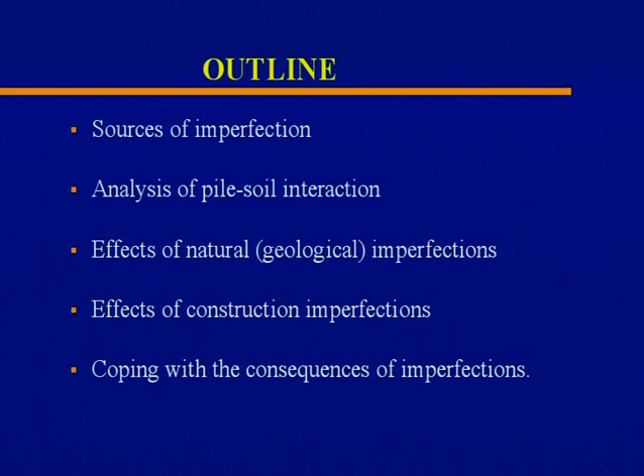I thought it would be useful to collect together some information and experience on how imperfections of various types influence pile behaviour. So I'm going to talk about the sources of imperfection, briefly, then say something about the analysis of pile-soil interaction and how we arrive at some conclusions. Then I'll talk about the effects of geological and natural imperfections, and the effects of construction imperfections, and finally how we cope with the consequences of those imperfections.

We do some investigation, and then we idealize the situation. We look at the model of the structure, the model of the foundation, the model of the stratigraphy of the soil, the geology. Then we input into our mathematical model material properties that we have assessed, and we come out with a prediction of behaviour.

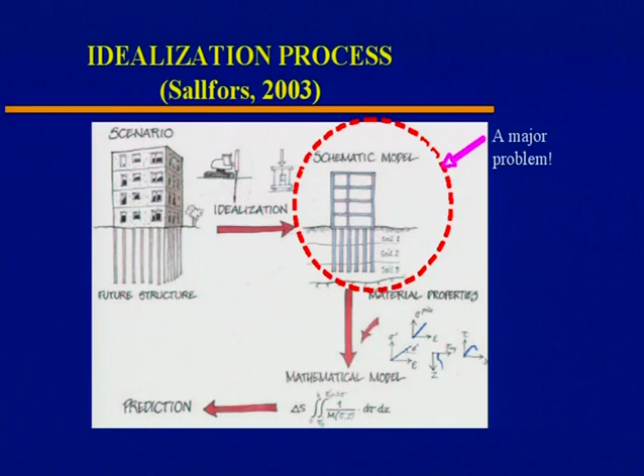So this whole process of prediction involves a number of fairly critical steps. What I'm really talking about today is this component of the system, the idealization of the model, and in particular how we model the piles and how we model the soil. That is a major problem.

In developing the schematic model, obviously the first thing we have to do is represent the site geology, and then simplify it to represent the stratigraphy as best we can, because we can't in a practical sense include every element of the real site geology. Then a major component is to assign geotechnical and structural parameters to the problem, and consider some of the realities: that soil behaviour is non-linear, pile behaviour is non-linear, and that the soil, rather than being a homogeneous isotropic elastic half space, is actually a layered non-elastic material.

We also have the possibility that loading of our foundation system may occur not only because of the weight of the structure and the forces on the structure, but also because the surrounding ground may move. I think Professor O'Rourke will be talking more about that in his lecture later on.

The sources of imperfection that I'm going to look at arise from three major sources: natural geological sources firstly, then inadequate investigation, and thirdly imperfections related to construction. Terzaghi, of course, has a quote that tells us that the earth in its natural state is never uniform. Unfortunately, in practice, clear and simple soil conditions are rather uncommon.

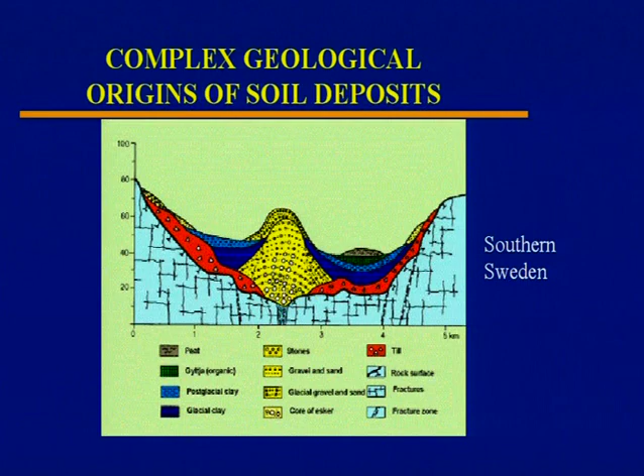Yet unfortunately, in much of our practice, we assume clear and simple soil conditions. There are many situations where the conditions are certainly not simple and clear. This is the geological origin of some deposits in southern Sweden, where the idealisation of this particular formation as a homogeneous semi-infinite isotropic elastic half space would be somewhat imperfect.

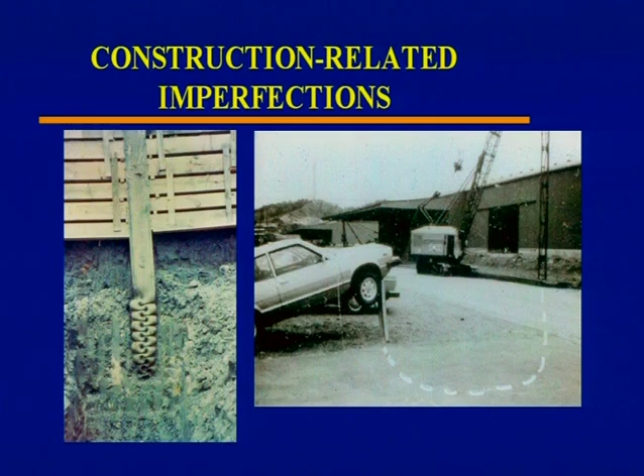And this very famous diagram, many of you will have seen this before, in Sweden, pile driving on this side of the road, driving, why are we not reaching rock? And of course what had happened, this pile, because it's an H pile, had turned around and was actually jacking this car up. So that's a pretty extreme example of imperfection, but compare this to what we assume in design, which is a vertical elastic member, and you'll see that this is anything but that.

And then, of course, we have the all too common situation where we have drilled shafts which are not integral. There are gaps in the concrete, there's exposed reinforcement and necking and so on, all sorts of difficulties if the pile is not constructed correctly. And yet, in our idealisation, in our design, we assume the pile to be a perfect elastic cylinder.

Now, if we're going to examine the consequences of these types of imperfection, then we need to have some tools available to look at those consequences. And in what I'm going to show you, I've used 2 or 3 different tools, depending on the problem. The first tool I've adopted is finite element analysis, trying to look at mechanisms and capacity of the pile or the pile tip as appropriate. Secondly, I've used boundary element analyses of pile-soil interaction, which incorporate both nonlinear soil and pile behaviour, and also the interaction between piles in a group through the soil.

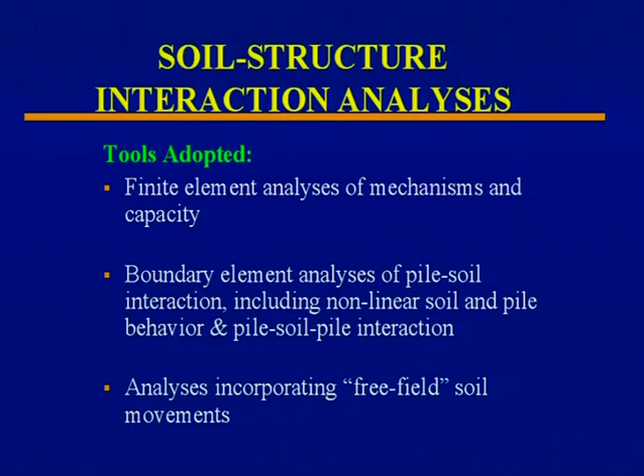And associated with those analyses is the ability to incorporate what's called here free field soil movements. These are ground movements that will impinge on the pile from some external source. And with that latter type of analysis, there are basically 2 ways you can go. The first is that you can do a complete analysis where you model the pile, the soil, the loading and the source of ground movement all in one single analysis. And this gives you a complete solution, but it's often complex and time-consuming, and it's often difficult to get all parts of that modelling correct.

And so I have preferred a 2-stage approach or a substructuring approach where we separately calculate the free field soil movements due to whatever the source of soil movements is. We then carry out a pile-soil interaction analysis using, for example, boundary element methods, and we find this to be generally a rapid and efficient way of doing the analysis, and one that is very suitable for parametric studies.

So I'm now going to look at some geological sources of imperfection, and I'm going to look, in some cases rather quickly, at 4 sources of imperfection. The first is where we have clay seams present below the pile tip. So the pile goes through soil into rock, but in the rock there are clay seams, a not uncommon situation. The second is where we don't have horizontal layers, but we have layers of variable thickness and perhaps sloping bedrock. The third case, one that I alluded to before, is where the piles are in fact founded in a stiff stratum, but there is a compressible stratum below, which will of course impact on the pile performance.

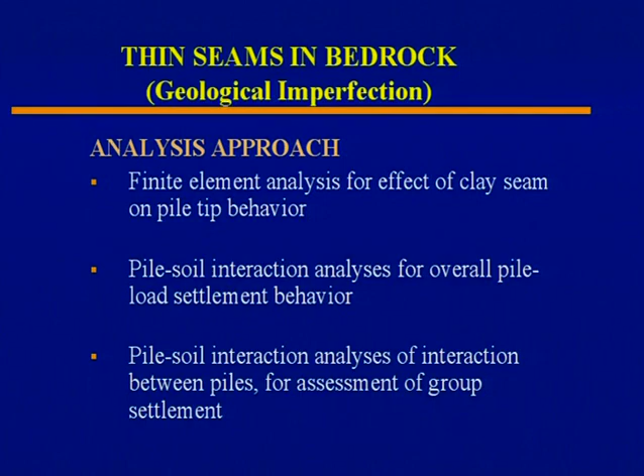I'm not going to go into great detail on that last issue, but let me start off with this basic problem. This represents the tip of a pile, and even though I'm looking at imperfections, it is of course idealised, but we have to make idealisations to get answers. So here's the pile tip. It's a rigid circular area of diameter d.

Here is our rock, which then has this clay seam, which is about 1/100th as stiff and as strong as the surrounding rock, and that clay seam is of a thickness Ts and is at a distance Zs below the base of the pile tip. And if we do finite element analyses of this particular problem, we get some indication of mechanisms and also of the effect of that clay seam on the load settlement behaviour of the tip.

Now, this first diagram is simply displacement patterns that come out of a finite element analysis, Plaxis in this case, when there is no clay seam here. So this is all rock. So basically this is the sort of pattern we would expect. The footing goes down, it pushes the soil up outside, and that's more or less what we expect.

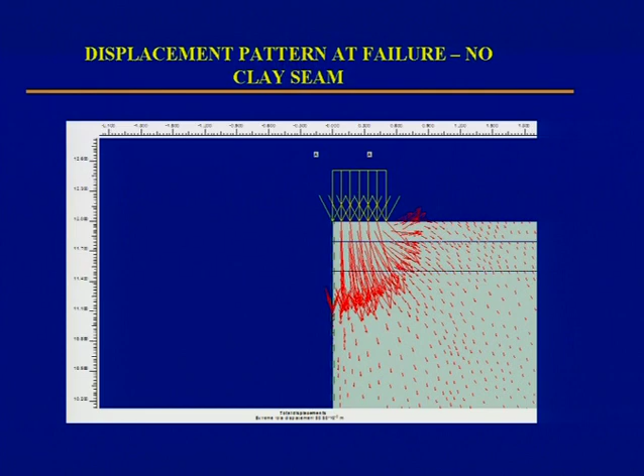This is load, this is settlement, and for the rock alone, without the clay seam, we have this rather stiff and strong behaviour here. And in fact, it turns out this strength is about 60 megapascals, which I can't convert into tonnes per square foot for you, but it's pretty strong, okay? It's basically the strength of concrete.

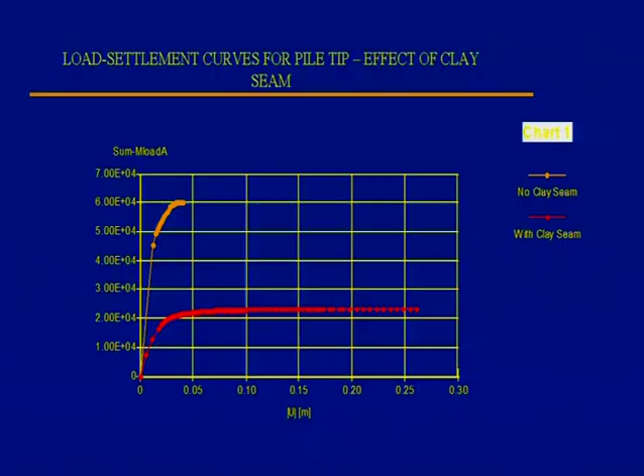However, with the clay seam, what you see here is that the capacity of the pile tip is substantially reduced, and also its stiffness is substantially reduced. So that clay seam does indeed affect the overall behaviour of the pile tip. And we can look at this in a parametric sense by defining a couple of correction factors.

I find it's always useful to look at these sorts of effects in terms of a correction to the ideal situation. So we define here a base capacity reduction factor, BCR, which is the base capacity with the clay seam to the capacity without the clay seam. And similarly, we can define a stiffness reduction factor for the base, BSR, as the base stiffness, load divided by settlement, with the seam to the base stiffness without the seam.

And so here's some parametric studies of that situation. Here is our base stiffness reduction factor, BSR, and here is the other one, the base capacity reduction, BCR. Let's just look at this top one now. This is the base stiffness reduction factor.

This is the relative thickness of the clay seam divided by the diameter of the pile tip, and this is the relative distance of the clay seam from the bottom of the pile, going from 0.8 diameters down to 0 diameters, which means that clay seam is right at the bottom of the pile tip. And what you see is more or less what you would expect, that the thicker the clay seam, the greater is the reduction in stiffness. And also, the closer the clay seam is to your pile tip, then the greater is the reduction.

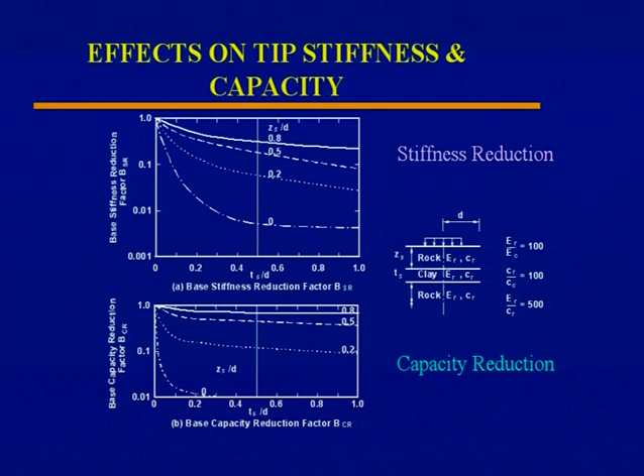And we have a very similar situation here for the capacity. So you see, that clay seam has a very dramatic effect potentially on both capacity and stiffness. Now, it's interesting to compare those theoretical studies with some design recommendations.

So what you see is, in fact, that there is a general correspondence between what we calculate and what we use in design practice on the basis of empiricism, although these design values are fairly extreme and are really most relevant to where you have the clay seam fairly close to the tip of the pile. If the clay seam is much further down, then the reduction in capacity is rather less than these design rules would indicate.

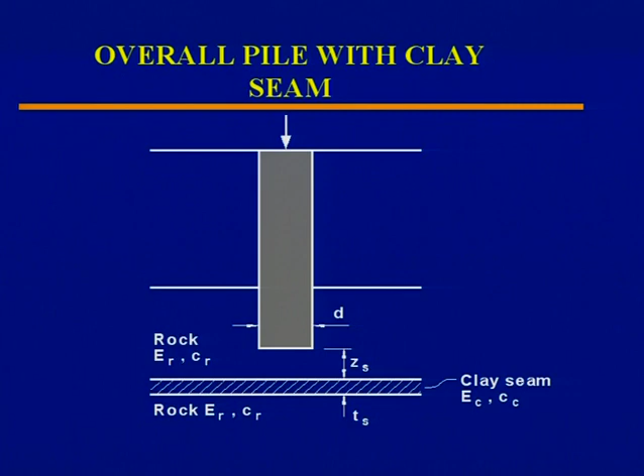So let's then look at the overall pile, because what we've focused on up to date is the pile tip. Now, of course, we have another component, the shaft, which provides capacity and stiffness. So how does the overall pile react to that clay seam? Well, when we incorporate the reduction in capacity and stiffness of the pile tip into this analysis, what we find is illustrated in these two diagrams.

And what we find, if I can just summarise, is that as the pile gets longer, as the length to diameter increases, the reduction in capacity compared to the case of no seam decreases. So we don't have such a dramatic effect of the clay seam on the overall pile when you have the shaft contributing. And of course, if that clay seam is relatively deep, then its influence is even less.

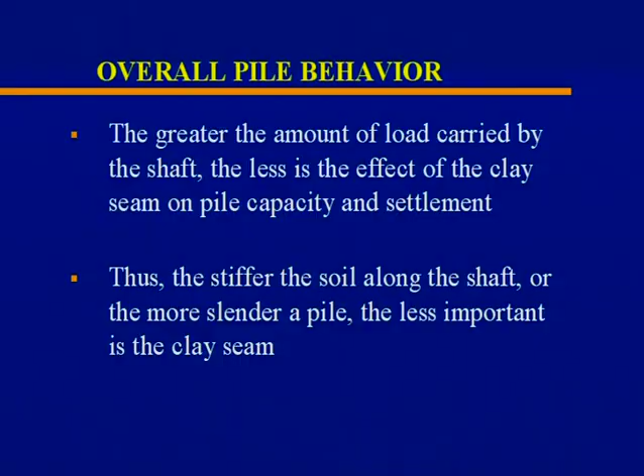And so the stiffer the soil is along the pile shaft, or the more slender a pile, the less important is the clay seam. However, I think you'll see that over-idealisation, ignoring the presence of clay seams, can certainly lead to some negative consequences as far as your prediction of pile capacity and settlement is concerned.

If I can just summarise very briefly the effects of a clay seam on a group of piles, it turns out, can be affected by a clay seam rather more than a single pile for two reasons. One is that the clay seam, relative to the overall dimensions of the pile group, will be closer than it is for a single pile. So it will sort of enhance the ability of the overall group to behave differently.

And the other thing is that we find that with a pile group, you tend to have more load coming down onto the base of the piles than you do with a single pile. And again, that means that the base is going to be more influenced than the shaft. So clay seams are nasty, potentially, and we need to try and incorporate them where we can into our design.

The next problem I want to look at rather briefly is what happens if piles are founded in a layer of variable thickness. And there are two or three consequences that we need to understand. The first of these is that if the piles are of different length, then they're likely to be of different stiffness. And so once you put vertical load on a pile group which does not have a uniform stiffness, then even though the load is vertical, the overall group will tend to rotate.

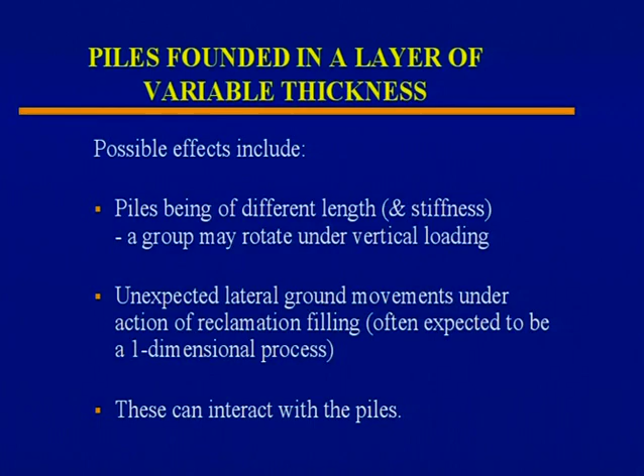And so I don't have time to go into this one in detail, but let me just give you the bare bones outline of this case. This was a building, a 27-storey residential building that was supported on 144 steel H-piles on a reclaimed area. And they were driven to a harder stratum, not to rock, but to a harder stratum. Now, this reclamation, there was some soft soil on the site, and so there were large settlements adjacent to the building, and that was expected.

And so what we found was that there were differential settlements of about a foot between the pile-supported building and the driveway that was obviously not pile-supported. So that was expected. What wasn't expected was that there were also lateral movements near the building because of the fact that the thickness of the clay, the compressible clay, was non-uniform, and also this building was getting towards the edge of the reclamation near a river close by.

And what in fact happened, we have convinced ourselves, is that these lateral movements actually generated very large bending moments and shears in the piles, and cracks developed in the pile caps, and some piles were actually detached from the pile caps, so they rotated so much, and of course they settled, that they actually came out of the cap. And so this caused a rather nasty cracking of the building.

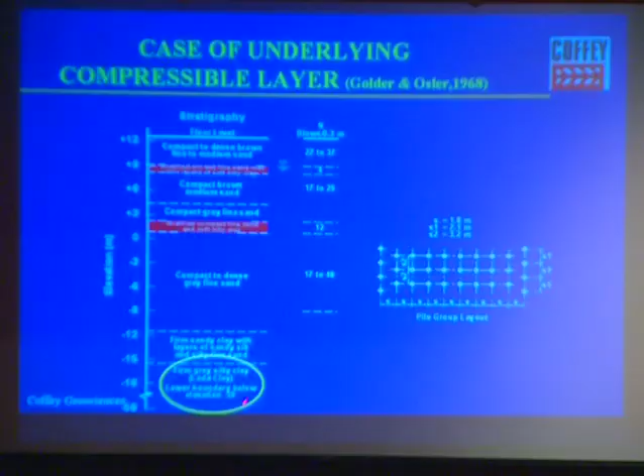Now, unfortunately, lower down here, below the tip of the piles, there was one of the classic formations in Canada, the Leda clay, which is a very quick and compressible clay once it goes beyond its pre-compression limit. What these people had done, not Golder because they told the story afterwards, but the designers had come in and done a pile load test, founded a single pile here, and what they found was, under the working load, it settled a millimetre. Only a millimetre. Terrific. Let's allow for group effects, so we expect settlements of 3 to 6 millimetres. Great. Well, what they actually measured several years after was a maximum settlement of the order of about 74 or 75 millimetres and counting.

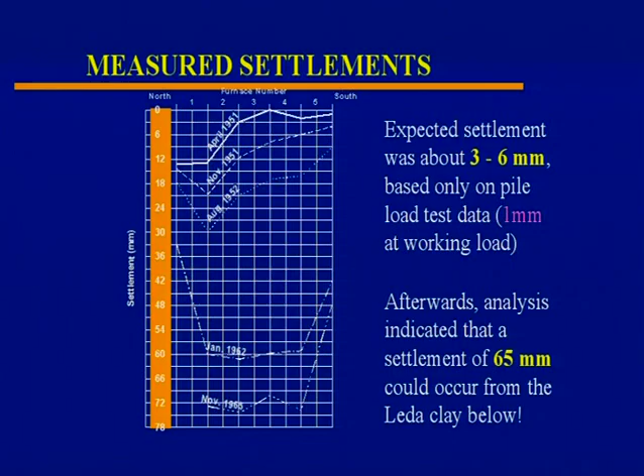And of course, what happened, if we go back to the previous diagram, was this, that whereas a single pile driven down here will have very little influence on this compressible clay layer here, a group of piles, which of course is of much greater extent and whose pressure bulb is much more extensive, will indeed load up the Leda clay. And that's what happened. And then in the post-mortem here, Golder and Osler indicated that they reckoned that there could be about 65 millimetres of settlement coming from the Leda clay below. So this is a warning sign.

It's very common, I've found, for clients to want to found their piles up as high as they can, obviously to save money, and there may be compressible layers below. And I think you need to think very carefully about how you do the assessment of settlement in particular and capacity as to whether or not that's a sound strategy to pursue.

So the lessons from this, and there's always lessons to be learned: don't use single pile load test data to predict group settlements without proper ground characterisation. By all means use pile load tests, I love them, but be aware that the group has a different volume of influence than a single pile. And of course compressible underlying layers can cause substantial increases in settlement.

The last geological imperfection I want to talk about is the effect of a boulder. And just to show you how boulders can occur, this is a slide that was provided to me by Dr. Manfred Nussbaumer from the Züblin company in Germany. And he'd done a project in Germany where they drilled a couple of boreholes reasonably close by and found dense sand, medium dense sand here, a bit of clay, marl, but that looked fine. And then when they were actually excavating for construction, what did they find but this rather ugly boulder here?

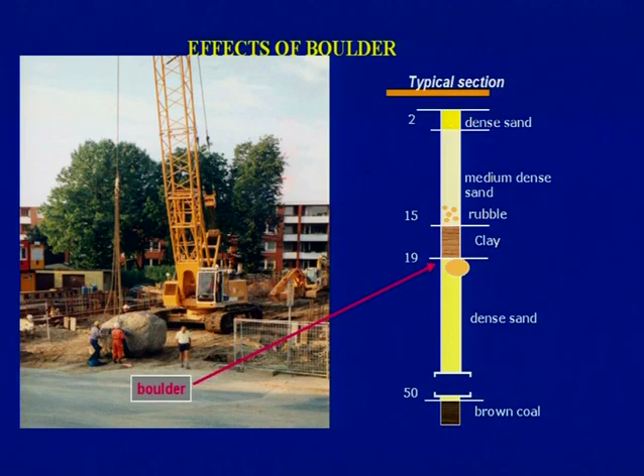And so boulders can arise in these sorts of situations, particularly, I guess, if they're in glacial regions, and they can influence the behaviour fairly significantly. And my interest in this, of course, Australia is not a glacial region, not to my knowledge, but I was involved in a project where there were, in fact, boulders in the subsoil left over from an old canal revetment.

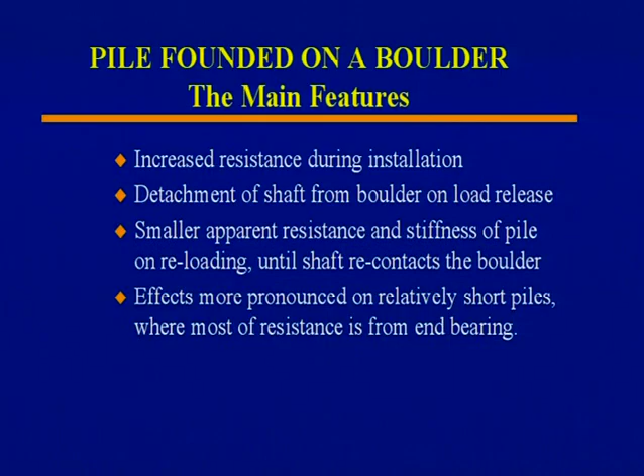So the main features then in situations where piles may be founded on a boulder are that you get an increased resistance during installation. The shaft then detaches from the boulder when you release the load, and you get a smaller apparent resistance and stiffness of the pile on reloading until the shaft recontacts the boulder. But in fact, that may be at a settlement which is unacceptable. And so obviously the effects are more pronounced on relatively short piles where most of the resistance is from end bearing, and that in fact was the case with this particular project in Australia.

I want to now say something about the idealisation of piles because I want to go on and talk about the possible consequences of construction imperfections.

Here is our design idealization. Almost invariably, we, as optimistic geotechnical designers, assume a perfect cylinder.

Regrettably, what we occasionally get is this. You've got debris at the base, so you've got the so-called soft toe because the drill shaft has not been adequately cleaned. You've possibly had too rapid an extraction of the casing, so you get necking, and you've got voids or weak areas because of inadequate tremieing. So you finish up with a structural element which is rather different from the idealization you made during the design.

Now, in order to look at this particular problem and try to gauge the consequences, what we can do is idealize the defects as elements of different diameter, stiffness and strength. And then we can carry out a pile-soil interaction analysis to look at the two main effects: a reduction in stiffness and a reduction in capacity of the pile.

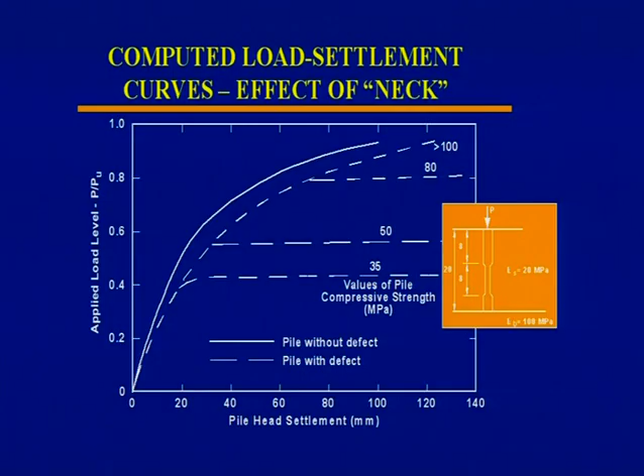However, if we start getting to realistic concrete strengths of 50 or 35 megapascals, then what you see is that basically the pile behaves reasonably well, and then all of a sudden, bang, it fails. And so the strength of that pile is then governed by the structural strength of the defect rather than the strength of the supporting ground.

Now, if we're interested in looking at this a little more generally, we can define what I've called here a structural integrity factor, which is the ratio of the stiffness of the defect, modulus times area divided by length of the defect, divided by the stiffness of the intact pile. So that integrity factor, at best, is infinity. If you've got infinite integrity, in other words, zero length of defect, that's a perfect pile. If you've got very small numbers, it means you've got a very small modulus or a very large length of this defect.

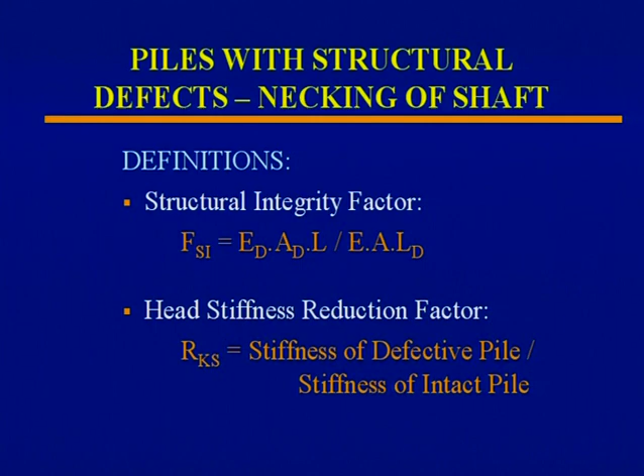And we can also, if we're interested in what effect this structural defect has on the stiffness of the load settlement curve, define a stiffness reduction factor: the stiffness of the defective pile divided by the stiffness of the intact pile.

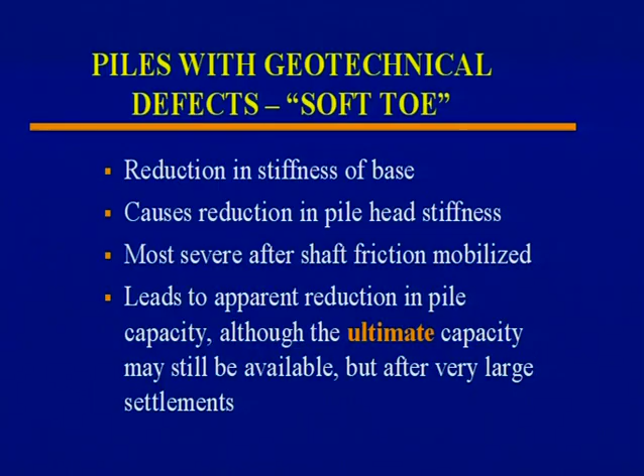That leads to an apparent reduction in the pile capacity. Although the ultimate capacity, if we're really interested in ultimate capacity, you may still have the ultimate capacity available, but it may occur after very large settlements, because if you've got a blob of soft clay, for example, at the bottom of the pile, as you keep loading, the clay has nowhere to go, so sooner or later it'll stop compressing. But that may be after you've gone a long distance.

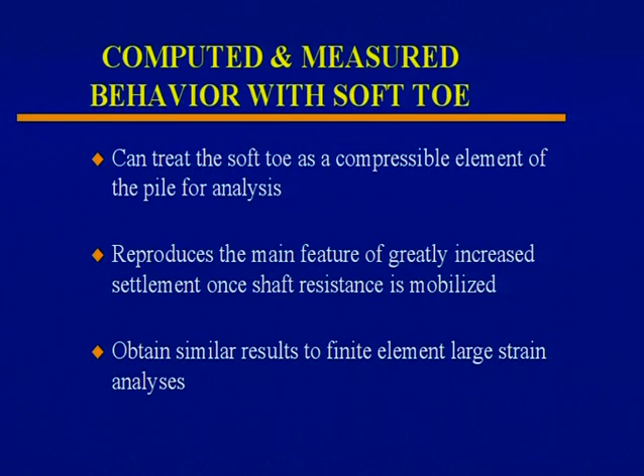Now, if we're looking at the consequences then on a particular pile, because this again is related to what happens at the pile tip primarily, we can in this case treat the soft toe as in fact a compressible element of the pile for the purposes of our analysis. And that reproduces, we found, the main features of the greatly increased settlement once the shaft resistance is mobilised. We in fact tried some large strain finite element analyses and got rather similar results with that more complex analysis.

Now I want to go on with that soft toe story and tell you about an interesting case in Hong Kong that was settled in court a couple of years ago. This involved two high-rise building blocks that had exhibited uneven settlement.

I'm not sure how many of you know this, but in the late 1990s, there was the existence of unconventional piling practices, shall we say, where some piles had been found to be shorter than they were supposed to be. As a consequence of that, measurements of settlement of buildings started to be taken fairly routinely.

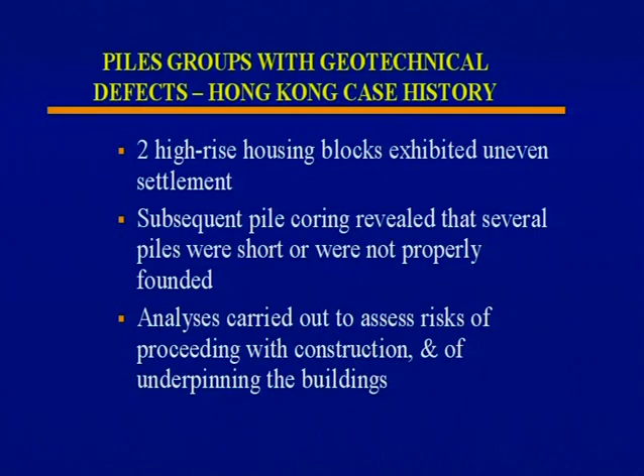They called a halt to construction at floor 34 and drilled through each of these drill shafts, which were 2.3 metres in diameter, supposedly with a bell. The pile coring showed that a number of the piles were short or not properly founded. All the piles were supposed to go through to grade 3 or better rock in Hong Kong, but a lot of them did not. So there was a significant period of evaluation where analyses were carried out to assess the risk of proceeding with construction and underpinning the buildings, because the contractor wanted to continue and correct the uneven settlement.

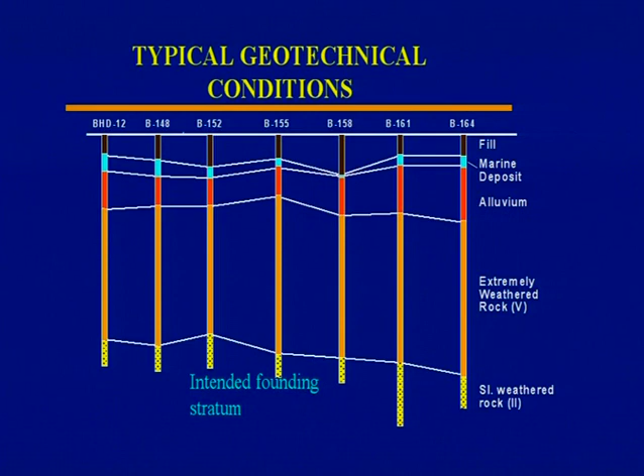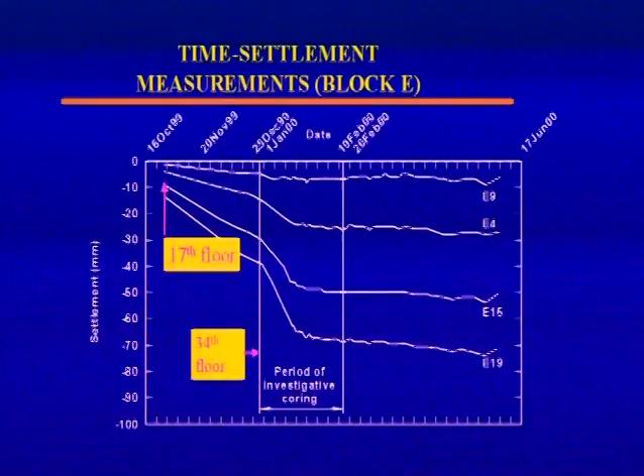Interestingly, when they did this investigative coring, they actually found that they induced additional settlements of the building of up to 30 millimetres. So this in itself is an interesting lesson, that when you do investigations below a building of this nature, inevitably the disturbance you cause to the ground is going to have some impact on the existing foundations, and indeed it did. Now this is, again, from the newspaper.

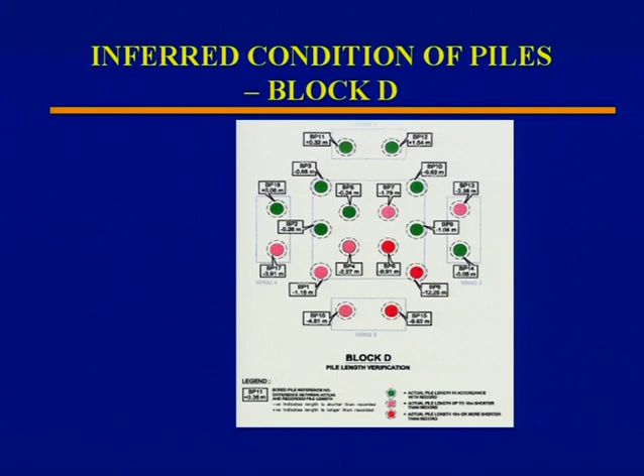In our assessment, working for the Hong Kong Housing Authority, we used a program called PIGS, Pile Group Settlement, which we developed and kept developing during the course of this. This program takes account of different pile types within the group. It accounts for soft toes and variable pile lengths, and we used a different model for each pile in the group because this was the reality - there was no point trying to use an idealised program where all the piles are the same. This program also allowed for settlement and rotation under vertical loads, although it assumed that the piles were pinned to the cap.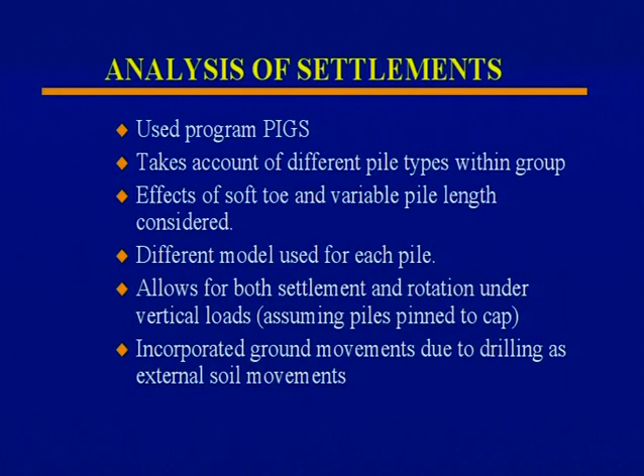What we were able to do then was simulate a whole series of forward scenarios. What would happen if they proceeded with construction without any action? What would happen if they proceeded with construction after underpinning and so on? Well, what we concluded from this analysis was that firstly, the uneven settlement of the buildings could be explained by the presence of piles with soft toes, and you see extreme soft toes, inferior founding conditions and shorter shafts than designed.

And there was, of course, also concern about drilling-induced ground movements during the investigations because the contractor's remedial scheme involved drilling 68 2-foot diameter holes into which they would grout steel H-piles. Now, if you drill 68 2-foot diameter holes, you're removing a lot of soil from a very highly stressed region, and that's going to impact on the existing foundation. So we were really concerned that similar movements could occur during remedial pile installation.

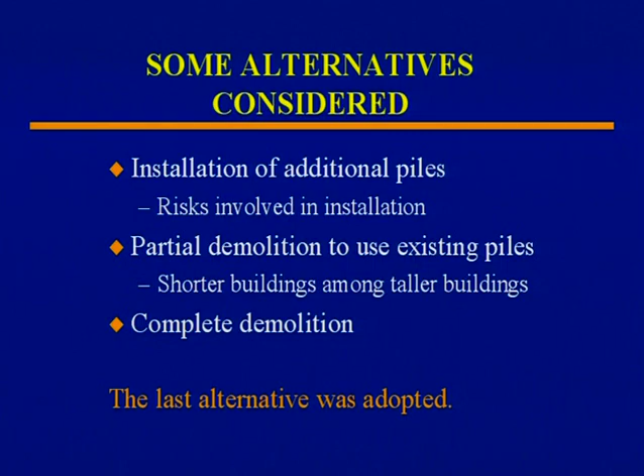And complete demolition. And in fact, the last alternative was adopted, and those 2 buildings were demolished over the following couple of years. There's still nothing built on there because it's all bad feng shui, and nobody wants bad feng shui in Hong Kong. Just as an addendum, the main contractor got hit for a judgment of 250 million Hong Kong dollars, still a lot of money. The piling subcontractor is serving a 10-year jail sentence at the moment.

Well, what happens if we find that we have imperfections? How do we cope with the consequences of imperfections? Well, there are three issues here. The first is investigation. And clearly, as this case has shown, we need to take extreme care to avoid further disturbance and settlement when we're actually doing investigations to try and find out what's there. Any SPT testing that you do must be done very carefully. You must be very specific about the processes. You mustn't extract too rapidly, otherwise you cause suctions and that loosens sand and so on. And you need to be very fastidious about balancing fluid pressures in drill holes or cores.

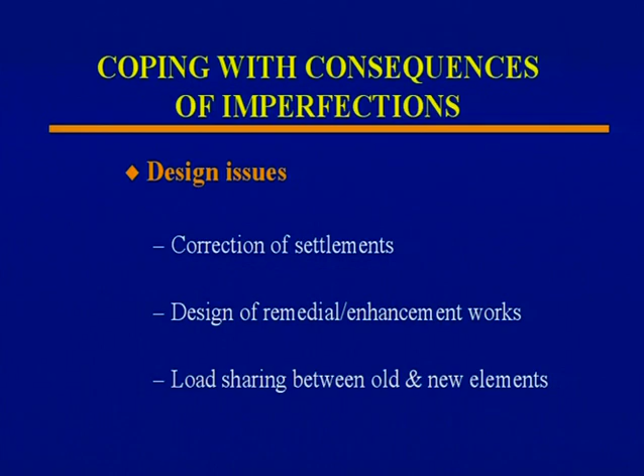In terms of design issues, you may need to correct uneven settlements, because if you've got a building, as we had here, that was already tilted, you need to do something to try and correct it before you finish the building. And that means that you have to design remedial and enhancement works as well, and of course you have to look at the load sharing between old and new elements of the foundation system.

Now, just very quickly, the correction of uneven settlements. There are a whole series of methods that can be used. And these are in two categories, which I classify firstly as hard methods. These are methods that structural engineers like because you actually do things to the foundations and the buildings, like anchor stressing. You actually pull the building down on the high side. Additional loading of the high side to make it settle more. Cutting of piles to make it settle more. Jetting of soil below the pile tips to make the high side settle more. Jacking of the foundation on the low side to try and jack the low side up. Or fracture grouting. All of these are basically intrusive, invasive methods, hard methods.

On another project, not these same two buildings, we in fact used a combination of a couple of those hard methods. We actually cut a series of piles below two buildings. In one building we cut 51 piles, the other one we cut about 20. And that's of about 300 piles in all. And we also did anchor jacking, and we also did soil extraction, which I'll talk to you about in a moment.

So these hard methods can be used in combination with other methods. The soft methods, these are methods where you get nature to do your dirty work. And the first of these, soil extraction, where you actually withdraw soil from the ground very carefully. Dewatering, where you try and induce settlement by reducing pore pressures and so increasing effective stress. But that's a bit dangerous because, again, dewatering is not the most precisely controlled process.

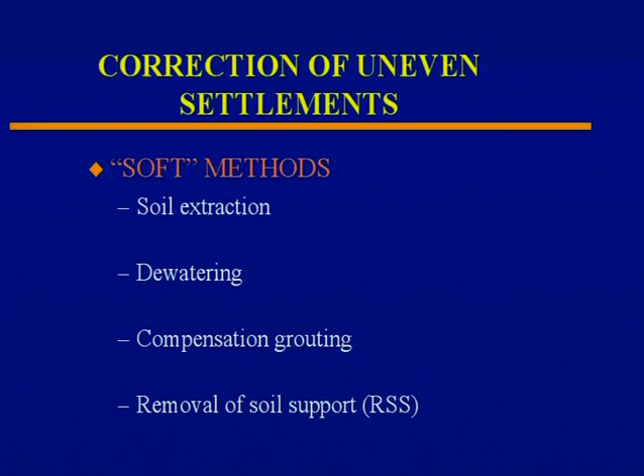Soil extraction has been most famous in correcting the tilt of the Leaning Tower of Pisa. And it was done in Pisa by a series of sub-horizontal drill holes where soil was extracted from under the Pisa Tower. The soil basically closed up, and that gave a half-degree correction on the tower, which will give it another 300 years of life at least. But that's not the first case.

There have been cases in Iran, for example, where under this leaning grain elevator there was a series of chain cuts made on the high side of the building. They dug a trench and they put in a horizontal chain, extracted soil, and managed to correct that tilt quite successfully.

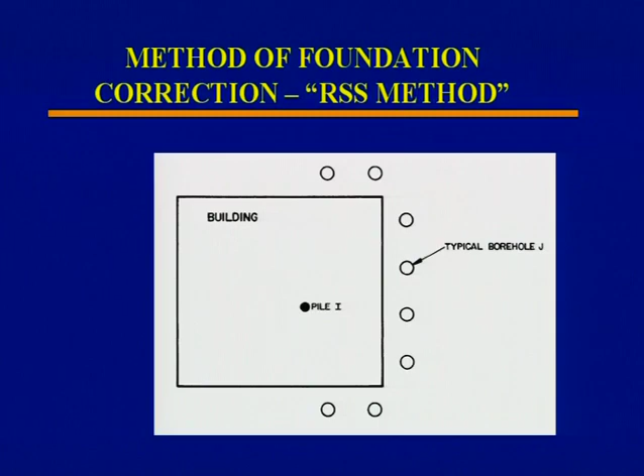This RSS method that we had proposed to the Housing Authority to use, and we almost got them to agree to it, and then they backed out, cold feet. The idea here is that you drill a whole series of boreholes outside the high side of the building footprint, so you don't go inside, you go outside, and what that will tend to do is to cause the high side to settle, and that will take the piles hopefully down with it.

Just very quickly, because time is getting on, foundation enhancement works. If we're looking at defective piles, we can look at the possibility of repairing existing piles to enhance their capacity and stiffness, although that's not always easy to do. We can look to extend the pile caps, make use of the pile caps to give us additional strength and stiffness. This is something that people tend to be hesitant to do, but we've done it on the odd occasion and it seems to have worked out.

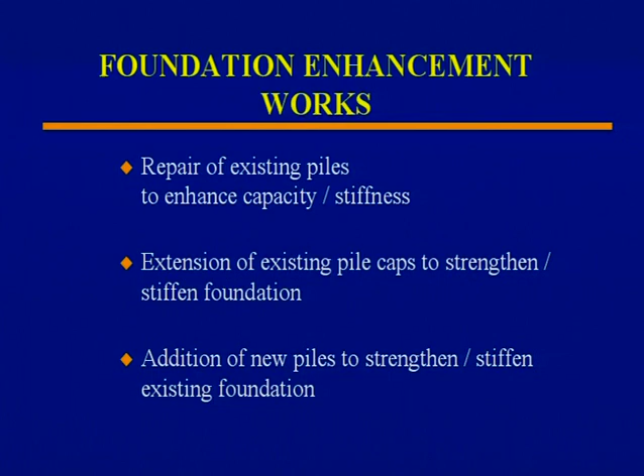And of course, there's always the possibility of adding new piles or underpinning to strengthen or stiffen the existing foundation. And when you do that sort of underpinning process, we have sometimes a problem in terms of controlling the way that the loads are distributed between the existing piles and the new piles. The new piles may well be stiffer than the existing piles, so there may be a load concentration on them. How can we avoid that?

Because in some cases, for example in Hong Kong, the design of piles is based on the most heavily loaded pile. You have to have a factor of safety of 2 against the most heavily loaded pile, and that kills many remedial schemes. Well, what we can actually do is to use what I've called controlled stiffness inserts on the pile head. And the whole idea is that here's the pile cap, here's the pile, and we introduce a lump of compressible material, neoprene or whatever, and what that does is it actually gives you another compressible element on top of the pile, and so reduces the stiffness of that pile effectively.

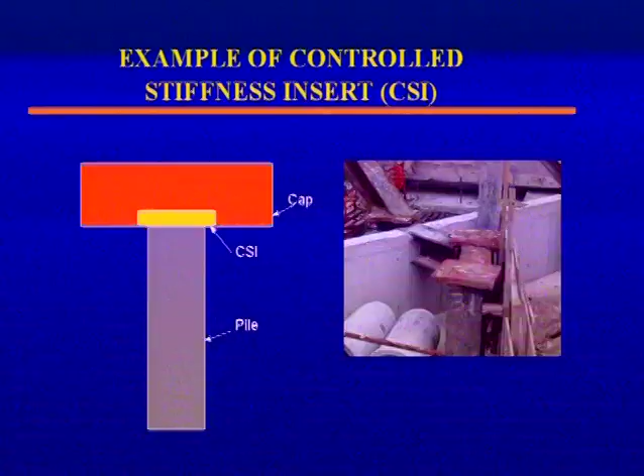And they have actually been used. I persuaded somebody to use them in Hong Kong, and here they are in place waiting for the pile cap to be poured.

So you can tune the stiffness of these inserts to give you the required load distribution, and you can work out what your target stiffness for those piles is. So what we've found is that additional piles can restore the performance of a defective pile. I had an example to show you, but time does not allow that.

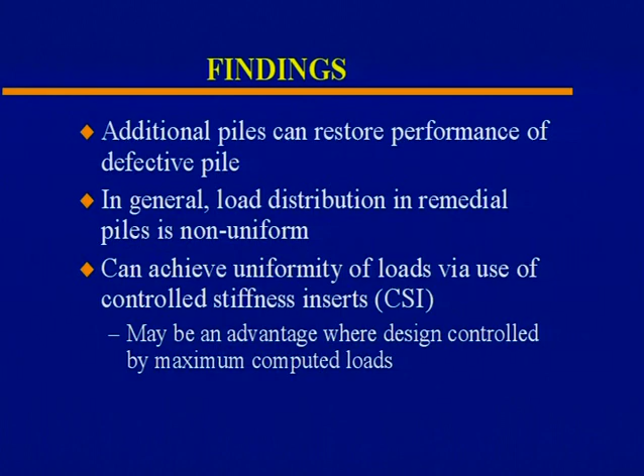In general, the non-uniformity of load distribution that we get in such a system can be relieved by use of these inserts, and that is an advantage where the design is controlled by the maximum loads that you calculate in the piles. So let me just make a few concluding remarks.

In terms of imperfections, they may create unforeseen problems for pile designers. And of course, the significance of those imperfections depends on their nature and extent. I think we should develop a mild form of atelophobia, fear of imperfections, coming from the Greek, of course, atelos meaning unfinished or imperfect, and phobia meaning fear. Fear of imperfections. We should always be on the lookout for that possibility.

The more important natural imperfections may include clay seams, compressible layers below the founding levels, and compressible soils of uneven thickness, and of course differences in founding conditions. Now, where you have, for whatever reason, variable founding conditions, then you have the potential for, even under vertical loads, differential settlements, lateral movements, head rotations, and additional bending moments in the pile heads under axial loading.

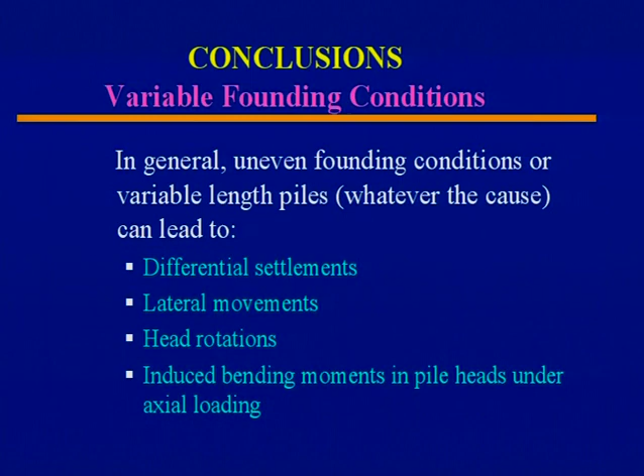In terms of construction-related imperfections, structural imperfections can be nasty. They may not show themselves up until the pile fails, and failure can be quite sudden. And there may be some reduction in head stiffness as well. Geotechnical imperfections, such as a soft toe, will lead to a reduction in stiffness of the pile, which of course depends on the length to diameter ratio and depends on how much shaft friction you have available.

Coping with imperfections, you need to be careful in investigation. Don't make the problem worse. I've not only this problem in Hong Kong, but there's another problem I've been involved with in Singapore where the actual investigations have exacerbated the problem you're trying to solve. And there are these hard and soft methods available if you're really bold and desperate to correct uneven settlements.

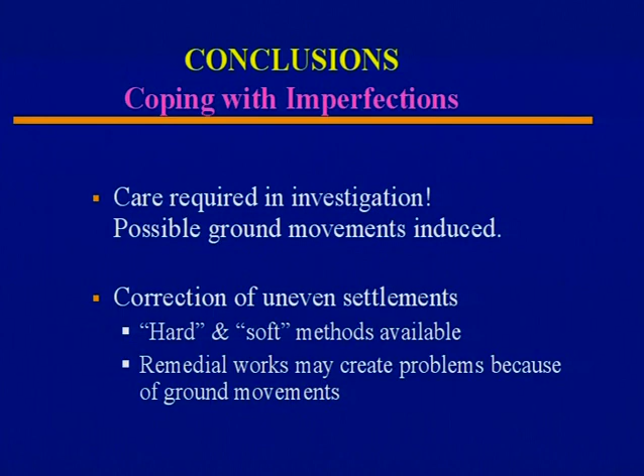When you design foundation enhancement works, it really is an interesting and challenging problem because you don't start off with the ideal situation where you've got all the pile group there. You normally have a pile group that A is imperfect, B has already been loaded in some rather complex way. Now you're introducing new elements and you're introducing generally additional loading. So it's a fairly complex problem, and you can control to a certain extent how that pile group behaves by the use of these inserts.

If the engineer is fully aware of the uncertainties involved in the fundamental assumptions of his computations, he's able to anticipate the nature and the importance of the differences which may exist between reality and his original concept of the situation. So, ladies and gentlemen, I hope that this talk has given you some idea of what sort of effects some of those differences may have on pile behaviour.

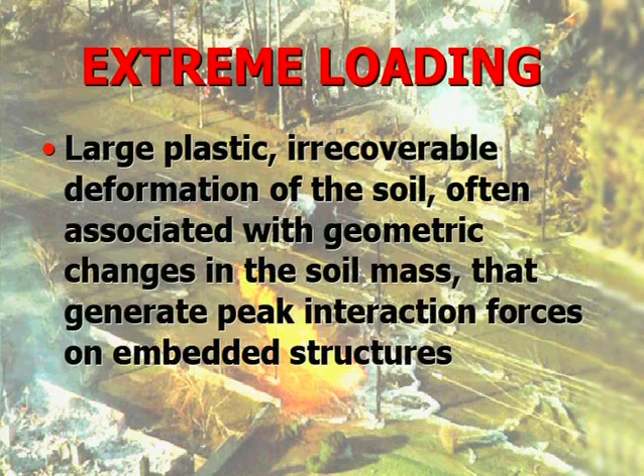These interactions of soil under these conditions will create peak loads on embedded structures, and the ability of those embedded structures to survive these kinds of deformation becomes an important part of our design considerations with respect to disasters. So extreme loading can be looked at as being caused by a number of natural and perhaps some unnatural disasters.

Earthquakes and floods, landslides, subsurface collapse and surface impacts, explosions, subsidence caused by mining and withdrawal of underground fluids, deep excavations and tunneling. All of these have the potential to generate extreme movement of the ground against underground structures, and that interaction is something which is very important.

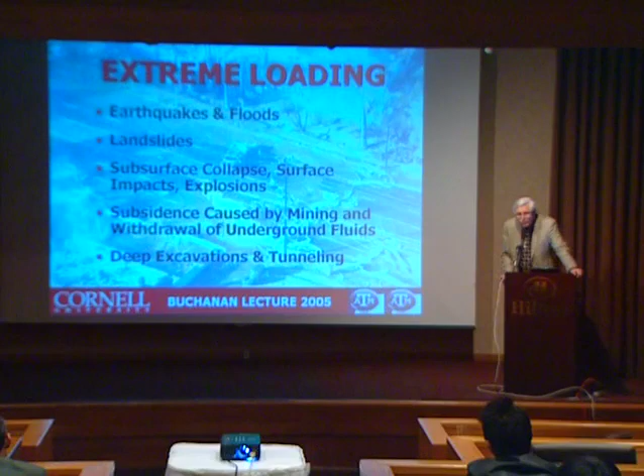I think we're all sensitive to the impact of disasters, particularly given the experience of the U.S. in the recent past. From the World Trade Center disaster to Hurricane Katrina, extreme conditions of loading are becoming a very important concern, not only for geotechnical engineers, but also for the entire civil engineering profession.

The topics I'd like to talk about today include geotechnical earthquake loading, because we have been studying extreme loading conditions in earthquake engineering for some years, and I think that some of the lessons we learn here have generic implications for extreme loadings under other applications, be they natural disaster or be they human threat related.

I'm going to talk about lifeline system response to earthquakes from the perspective of what we are involved with or concerned about with regard to soil structure interaction that will ultimately have some implication with respect to an individual structure. Certainly, Professor Poulos has talked to us a lot about the implications of settlements associated with pile foundations.

What I'm going to try to do is to talk to you about the implications of extreme loading for large geographically distributed systems, and in particular concentrate on the Los Angeles water supply, but also draw some analogies to other large distributed systems.

We, in being involved and concerned about extreme loading, not only have to be interested in the extreme loading of the soil, but that extreme loading of the soil often brings the structure which is embedded in it into an extreme loading situation, so it too becomes subjected in the extreme to plastic irrecoverable deformations and geometric nonlinearities. And I think that's where one of the major challenges is right now, is appropriately modeling the coupled problem of these extreme event conditions, both for the structure and the surrounding soil.

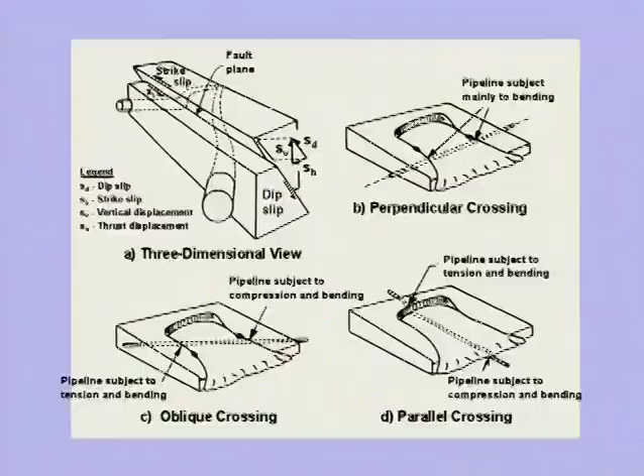And under earthquakes, we will generate ground deformation. In fact, earthquakes have been known to generate some of the most dramatic forms of ground deformation in terms of fault movement, where buried structures or underground structures can be subjected to tension, compression, depending upon which way they cross the rupture, and also landslides and soil liquefaction in the form of lateral spread, which can generate almost fault-like effects at the margins between the moving ground and the relatively stable ground surrounding it.

In fact, there have been a number of system-wide views on how to deal with permanent ground deformation, and here is a sort of generalized approach to the investigations that one might make for a large distributed system, starting with reconnaissance and project investigation and going all the way down this vertical line to site-specific subsurface investigations to try to deduce what the implications in earthquakes would be with respect to regional uplift and subsidence, surface faulting, landslides, liquefaction, which can cause flow failure, and settlement, buoyancy, and lateral spreads, and then consolidation of loose granular soils.

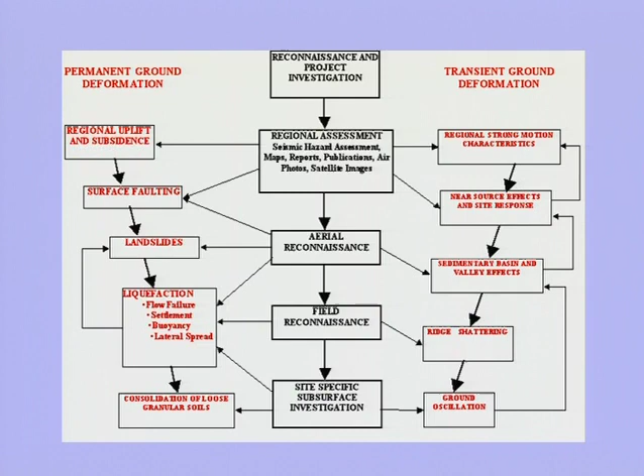There are also a number of dynamic interactions between the ground and buried structures that are caused during earthquakes, which involve some very interesting effects. Most recently, we recognize that when earthquakes occur, if you are within approximately 10 kilometers of the fault rupture, you get what we refer to as near field or near source effects.

And these involve very large pulses at times of acceleration, velocity, and displacement, which can have some serious repercussions.

Next, I'd like to talk about lifeline system response to earthquakes, and in doing so, I'd like to say a few words about geographical information systems. This is a tool that allows civil engineers, urban planners, and a variety of other people to use software to manipulate, analyze, and display geographic data in digital form. But it's far more than just a map-based technology.

Geographical information systems allow us to create a template of our physical infrastructure in the form of maps, and then to superimpose on those maps relationships in multiple dimensions that we never anticipated, or never could see without looking at them in this common framework.

If we think of civil infrastructure systems, most of us concentrate on the physical environment. So we're either dealing with the built or the natural environment, for which there are so many data sets these days, and so many servers and so many different locations, that GIS allows you to draw data from a multitude of different sources and put it on a common reference plane with your own data and understand its implications regionally and locally. But there's also the social environment.

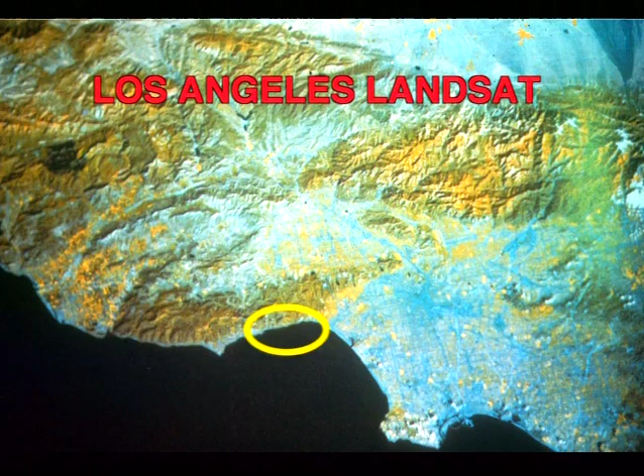And then there's something else in this map which is quite distinctive, that if I put this little circle here on the Malibu coast, that is the Malibu home of Arnold Schwarzenegger. Now, you might laugh, but in laughing, what you've done is acknowledge that every map has a personality, and it's really the human dimensions of maps that tie things together.

And by the way, Governor Schwarzenegger has indicated that he is very interested in building civil infrastructure, to the tune of trying to find a bond issue for $50 billion in California alone. So he may well be our next civil infrastructure champion.

So consider that geotechnical engineering through GIS can not only link and connect with the built environment, but it can link and connect with the social environment, to integrate and understand the relationships among some very interesting different data and different characteristics of our infrastructure.

The Los Angeles Department of Water and Power serves approximately 3.8 million people. The other provider in that area is Metropolitan Water District, which supplies water to smaller municipalities comprising the other 8 million or so folks in that particular area. It operates about 12,000 kilometers of distribution and trunk pipelines, where distribution pipeline is defined as 300 millimeters, or 600 millimeters or less in their terminology, and larger is the 600 millimeters. It covers an area of about 1,200 square kilometers.

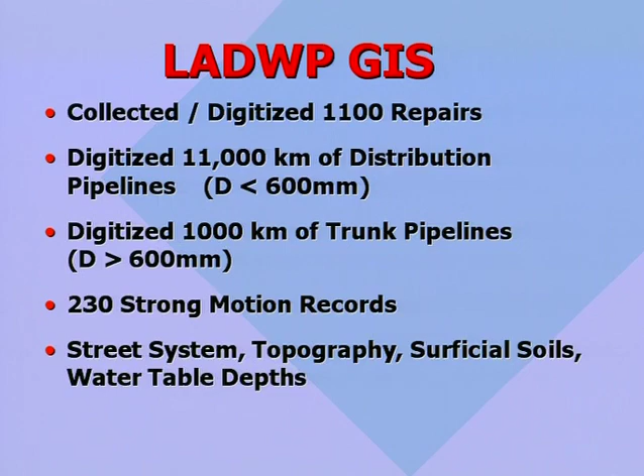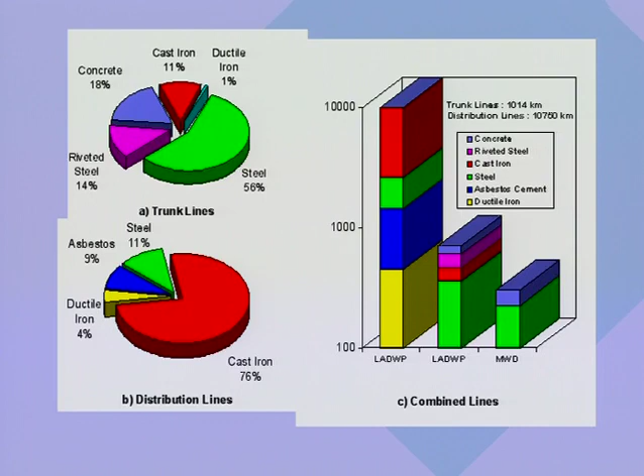What one can do in assembling this kind of information is get an inventory of the composition of the system. If we look at the distribution line system, characteristic of a lot of infrastructure in the United States, about 76% of all the water distributed in Los Angeles goes through cast iron water mains. That's the exact same percentage as New York City and a number of other major conurbations in the United States.

So we can make a fundamental observation: the Los Angeles water pipeline network can be treated as a giant strain gauge. What we need to do is take a pipe which is reasonably consistent in composition, like the 8,000 kilometers of cast iron, something reasonably sensitive to movement, and cast iron certainly is because it's non-ductile, a brittle material, then look at the repair pattern and systematically analyze it to deduce how the ground was locally behaving during that event.

In GIS, you can take the system of water supply in Los Angeles and put a grid on it. I'm going to demonstrate the effects of a 2 by 2 kilometer grid separation system, so each cell is 2 by 2 kilometers. Within that grid, we count all the repairs that occurred and divide by the kilometers of cast iron pipeline located in that cell to create a repair rate in repairs per kilometer, then draw contour lines to indicate where the strongest intensity of ground shaking was, based on its effect on the system.

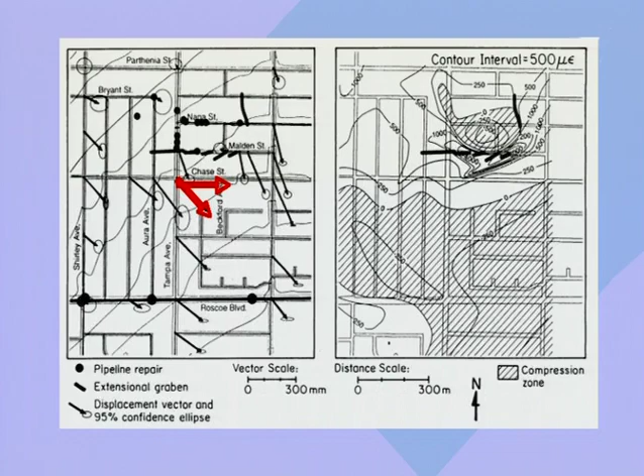And they could then deduce from that, by doing some manipulation of the vectors, some estimates of ground strain, which you see over here. I'd like to focus our attention on this vector, which is about the maximum displacement, but not representative of the others. We notice it's a little over 300 millimeters, so maybe on the order of 35 centimeters or so.

Their explorations disclosed - and this was truly astonishing, because nobody could figure out why there was such a high concentration of pipeline damage at that location - soft clay deposits, normally consolidated clay, existing about 5 meters below the ground surface, just below the water table. These have now been attributed to overbank deposits from previous historical and prehistoric flooding in this area. This is a semi-arid environment; you wouldn't necessarily expect to find soft saturated clays.

They only were able to put 4 borings down, and they hit the clay in 3 of them. So the possibility of this being rather extensive certainly is a reality.

This soft clay has a low strength, on the order of about 20 to 25 kilonewtons per square meter. So it's weak enough that under high pulses of acceleration, we may get deformation. One can perform a Newmark sliding block analysis, assuming the soil behaves as a rigid material that can slide if the accelerations generating inertial forces downslope exceed some yield level associated with the resistances acting against the downward movement of that block.

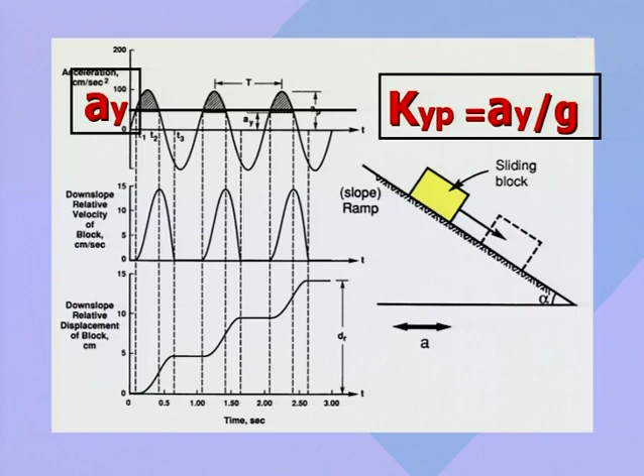If one were to define a yield level of acceleration, and then define the dimensionless acceleration as the ratio of that acceleration to gravity, then by integrating the areas above that yield acceleration line, one would get velocities, and by integrating velocities, one would get displacements. So we took a record available through the seismometers deployed by the University of Southern California.

There was one seismometer within 1 kilometer of that area. We resolved the displacements, or the records, perpendicular to the ground surface at that location, and calculated what the yield dimensionless acceleration would be.

That's a function of the direct simple shear strength developed along the sliding surface, a passive resistance at the down-toe end, an active resistance at the up-toe end, and the tangent of alpha indicating the orientation angle, which in this location was only about 1 to 2 degrees. The site looked like it was virtually flat.

What's interesting is that the relationship between the direct simple shear strength of soft clay, particularly normally consolidated clay, and the effective vertical stresses at that depth is anywhere from 0.22 to 0.3 - a favorite number - multiplied by the overconsolidation ratio. We substitute that back into our expression.

We can come up with a recognition that if the length of the slide is long relative to the depth, and the tangent of alpha is relatively small, this yield acceleration is really related to overconsolidation ratio. In fact, one can show that when overconsolidation ratios begin to reach values of 1.5 - lightly overconsolidated to slightly more, around 2 - the opportunity to generate significant downslope movement becomes severely diminished.

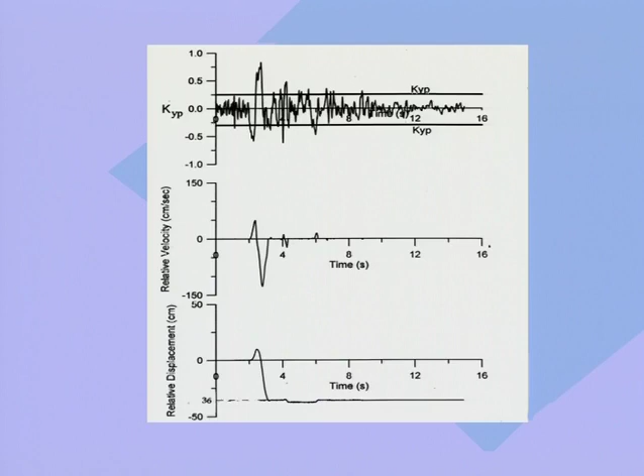This is that record resolved in the direction of the slide by double integrating these accelerations to get velocities and displacements. We actually came up with about 36 centimeters of downslope displacement, which was very consistent with and close to what was measured in pre- and post-earthquake surveys.

You can take air photos and do pre- and post-earthquake analysis, and by doing photogrammetric measurements, get a map of the permanent ground deformation from the earthquake. Working with our Japanese colleagues, particularly Professor Hamada of Waseda University, we collected air photos, flying high-quality, low-altitude aircraft to get stereo pairs after the earthquake. By analyzing those photos photogrammetrically, we could evaluate the displacements of the ground - shown here in the vicinity of Balboa Boulevard.

And what you see also here are sort of mauve or purple arrows, which were inferred displacements, again, by surface surveys that were done of the street before and after the earthquake. And you'll see that the air photo vectors are reasonably consistent with some of the survey data.

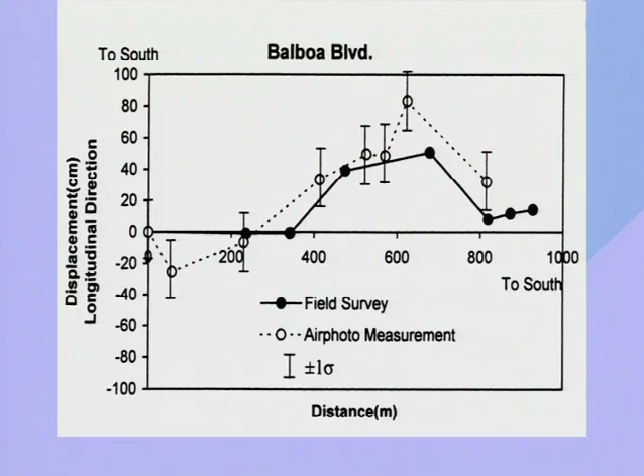And in fact, if we were to compare displacements that were given by the air photos and survey data in the location of this lateral spread on Balboa Boulevard, one sees the comparison. It looks like this. There is some disagreement, but overall there's reasonably good agreement between air photos, which do carry a certain amount of error in them, and the actual surface measurements that were made on Balboa Boulevard, so that we have some confidence that these air photos are giving us a good global idea and reasonably accurate one of displacement patterns.

We then can take these displacement patterns and infer from that ground strains, draw contours of ground strains associated with permanent ground deformation, superimpose upon that the pipeline system and the repair rates, and then draw a correlation between repair rate and permanent ground strain in areas of ground failure. And this is showing contours of ground strain.

We have compressive strains here where the pipeline was buckled, tensile strains here at the upper edge of the failure on Balboa Boulevard where it was pulled apart, a variety of different pipe repair locations in this particular area, and then a superposition on these ground strain color contours of pipeline repair rate here in terms of 5 repairs per kilometer, very heavily concentrated damage here.

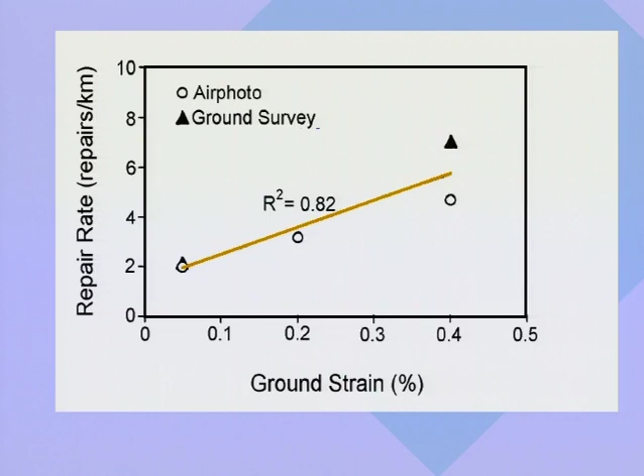And one can then infer, and this is just the beginning of this kind of work, relationships between repair rates and ground strains that might look something like this. We also can take strong motion data associated with the seismometer information. This is color-coded in terms of various ground velocities. Ground velocity, for a lot of reasons, is a representation of ground strain. That is most directly correlated with the pipeline damage being a buried object.

And if we now count the number of pipeline repairs within these color contours representing, let's say for here, an average of 55 centimeters per second peak ground velocity, we can get a repair rate that correlates with that velocity. And what you see over here are a variety of regressions that were developed, all having reasonable R-squareds that allow us to do better in loss estimation analyses for future earthquakes and future events that would generate velocities of this order.

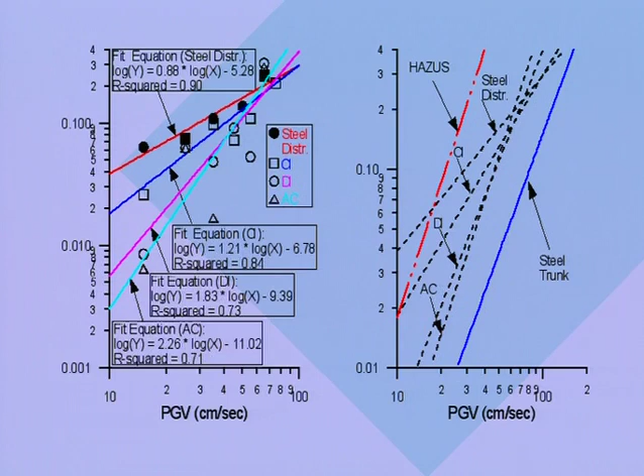Talk now about large-scale tests of ground rupture effects on buried structures. And I'm going to talk about what, at the time, and I still think is, the largest laboratory experiments of ground rupture effects, performed at Cornell with the support of the Tokyo Gas Company. And Tokyo Gas is concerned because they have a lot of what they call high-pressure gas distribution lines that go through Tokyo, and very many locations in Tokyo are subject to soil liquefaction, which can generate lateral spread.

And as any pipeline in a crowded urban environment, it has to change directions relatively rapidly along existing rights-of-way, which are typically the streets. So you get a lot of 90-degree elbows or bends in the line, which are part of the structural feature. Sometimes they're 120-degree bends, or they may be 70 or 60-degree bends. But we looked at a 90-degree bend and the effect of permanent ground deformation that would affect the behavior of the pipe at that bend.

And this is a picture of the test basin prior to running the test. Here is an actual pipeline shipped from Tokyo. It happens to be 100 millimeters in diameter. You can see the bend in this part of the box. This is one of my previous students, James Mason, who is standing in the box to give you some scale.

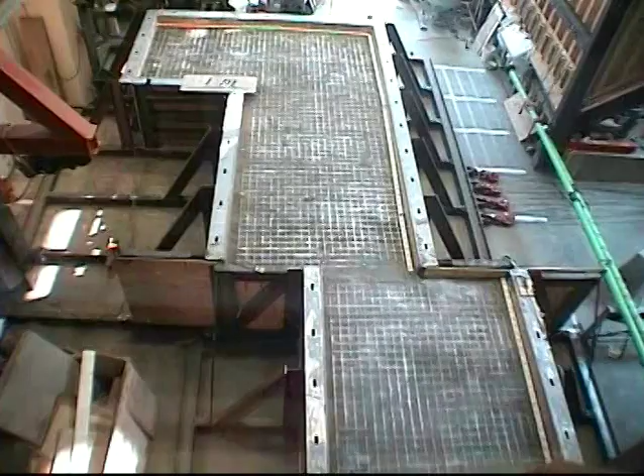So you can see the rupture occurring here where the actual displacement between the two boxes is occurring, and you'll see the fractures and cracks starting to emanate longitudinally along the pipeline. But if we replay this, I want to concentrate your attention down here where the elbow of the pipeline is, because in the distance you're going to see some manifestations of permanent ground deformation at the surface.

And so the next slide is showing you from that angle. The elbow is in here, and you can see that it's stationary. It's anchored over here, and as the ground is moving forward, it's acting as a plow, if you want. The ground is settling on the far side of it and being heaved up in terms of a net passive resistance that's being developed in the ground on the other side.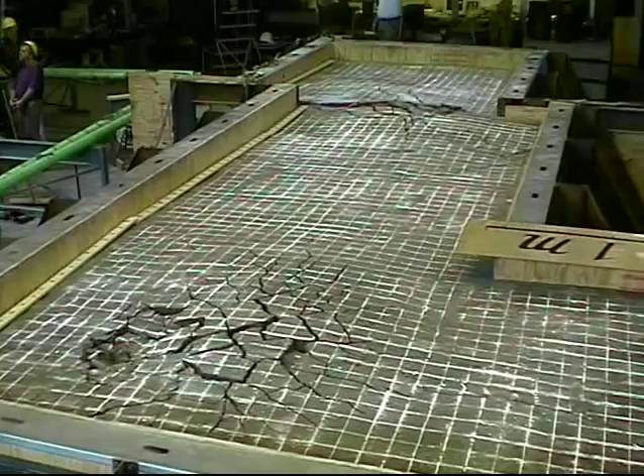So if we look at the final shape, you can see that as this block or this basin has been moved from left to right, it's created this deformation, an inflection point in the pipeline, which we would anticipate. And we took all these tests to failure. The 1 meter was sufficient to fail the elbow in each case.

The way in which we try to model this behavior, because an elbow is a shell, so we need to evaluate this as a thin-walled shell. And we use the program Abaqus and combined shell elements with beam elements to represent long lengths of the pipe that would essentially behave as beam columns under this circumstance, and then connect these with PY relationships and TZ relationships

and so forth to get the combined interaction between the soil and the structure, where here, by virtue of multi-point constraint, we weld our analysis of the shells to our representation of the pipeline not undergoing that three-dimensional deformation in terms of a beam column.

And the way we were looking at the interaction here is somewhat a conventional means, but one which is, at this current stage of our technology development, able to capture some of these large relative displacement effects between buried objects and the surrounding ground in terms of PY relationships, or longitudinally in terms of TZ, and then QZ for the vertical.

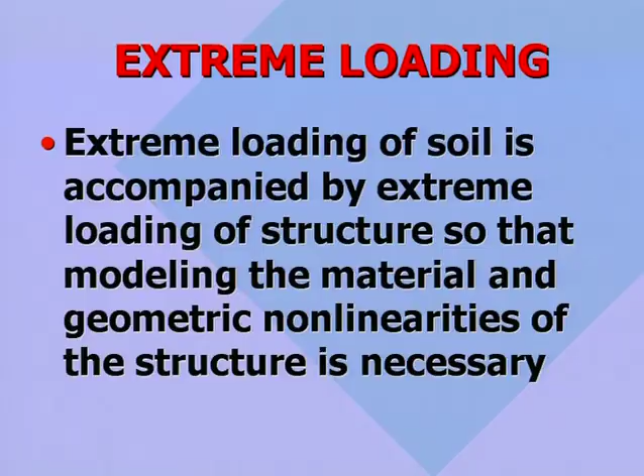If we look at this as an extreme loading condition, we recognize that extreme loading of soil is accompanied most often by extreme loading of the structure, so that modeling the material and geometric nonlinearity of the structure is also necessary. And a series of tests were actually performed on these elbows.

This happens to be a closure of the elbow in the direction of the 90-degree elbow. So this is 80 degrees, and interestingly enough, when you deform them in the closing mode, they don't break. They are ductile enough to withstand the deformation. Here's some of the hybrid model compared relative to the actual experimental data.

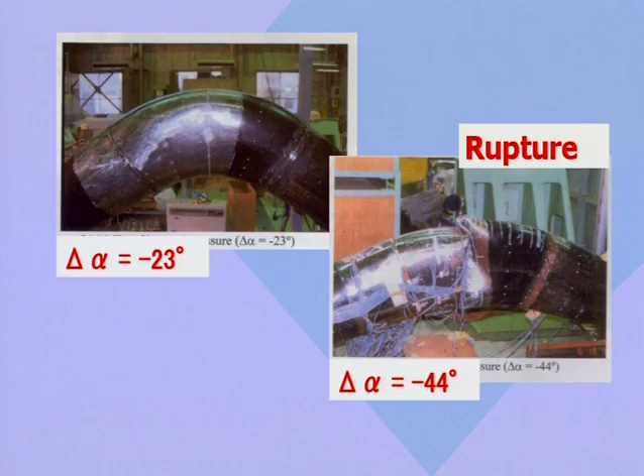But when you flex these in the opposite direction, so now instead of closing it like this, you press down to open up that particular elbow, they will rupture. And this is undergoing a change in angle of about minus 44 degrees, the change in angle being opposite to the positive angles that we saw before. So understanding these structures in terms of their nonlinear behavior and then coupling them together becomes important.

The principal results of these large-scale experiments were that it qualified and validated a hybrid finite element model that is used by Tokyo Gas in terms of their general engineering analysis, design, and siting decisions. They also learned that if they could increase the wall thickness in the vicinity of the welds by only a fraction of a millimeter, that actually increased the performance by over 200%. So that was a very dramatic and important contribution.

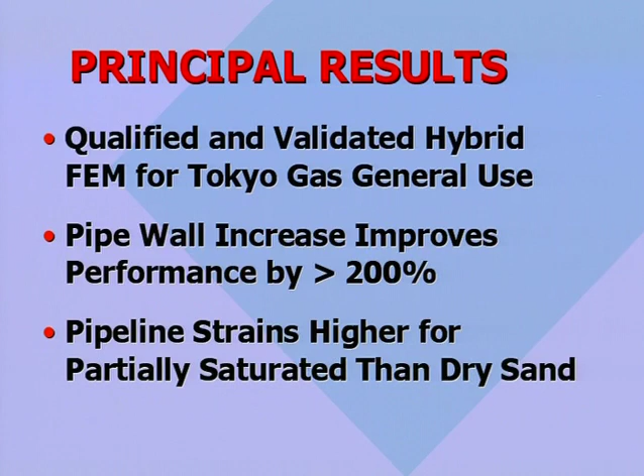And then we found that the pipeline strains were significantly higher in partially saturated soil, at, as best we could establish it, similar densities, than for the dry sand.

Now you may ask why we only use 4 to 8% water content. Well, strictly speaking, if you're dealing with soil above the groundwater table, you should only put as much water as can be held within the interstitial voids. And with the densities we could achieve, any water content higher than about 8% just gravity drained in terms of partially saturated flow to a lower level.

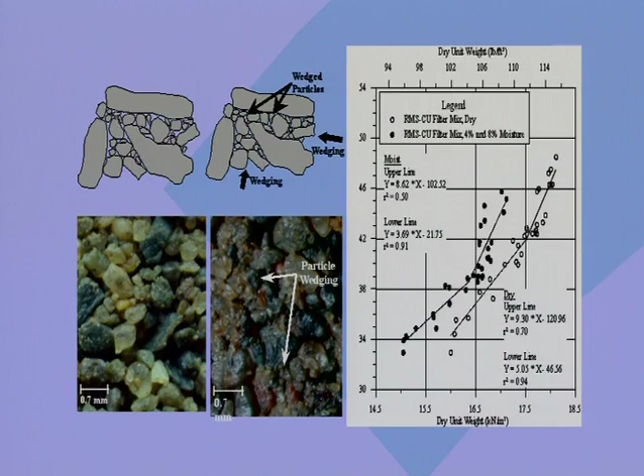And what we noticed is that this junction going from an ascending level of peak shear resistance relative to dry unit weight, this accelerating point here, where it goes up at a much faster rate, is associated with small changes in density that are related to wedging of the smaller particles, like real door wedges, in between the larger ones, and literally locking them into place to have a significantly larger asperity or interlocking aspect to them. It's quite remarkable, and it occurred very dramatically for all the sands that we've looked at, and we've tested quite a few, at a certain point in the dry density plots.

We evaluated dry density with what's called the Seelig density scoop. This is a device that, when the operator places it with a particular platform on the ground and applies a certain weight, these scoops go down, and the weight which is picked up in the scoop can be correlated to the unit weight of the soil, and then we can correct for moisture content and get the dry unit weight of what that soil is at that location.

We found that when we got into the denser sands, and in particular when we got into the partially saturated sands, they tended to be very dilative and very volume expansive. So what happened is, as the density scoop began to be pushed down into the ground, it tended to rise up, and we didn't get as much soil in there, and therefore it gave us a correlation for a lower dry density than we should have had.

So we had to modify the testing process to provide enough anchoring force on that platform plate in order to make sure that that scoop wasn't moving, and we got an appropriate correlation between what was carried in the scoop and the actual density of the material we're trying to measure. And when we made these corrections, we got this very, very nice correlation line in here, uniting both the dry soils and the partially saturated ones.

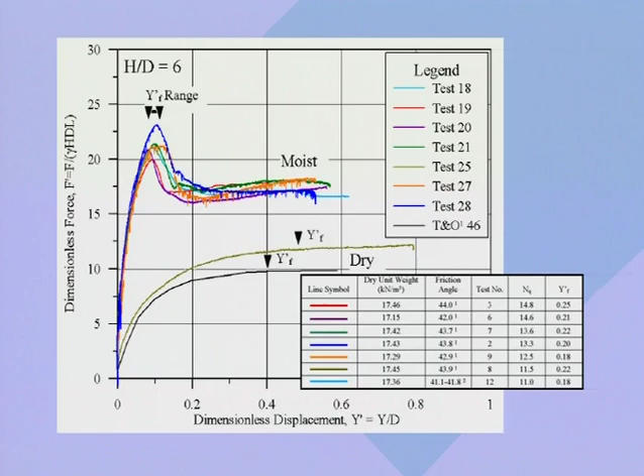The test results look something like this. At comparable levels of dry density, you have, for the dry sands, something looking like this, and for the partially saturated sands, a much more brittle behavior, higher initial stiffness, and most importantly, a significantly larger lateral maximum force.

What is equally interesting is the geometric failure conditions associated with the partially saturated soils relative to the dry. In dry soils, there tends to be a flow of the drier particles around the pipe in a kind of a generalized surface of concentrated deformation.

In the small amount of water that was added, it is as if you were to go into a room that had a stack of chairs that were randomly distributed, and you were to push on those chairs and they'd fall over. And then you'd sprinkle a little bit of water on those chairs, and you try to push them over again, but you couldn't get them to push over until you exerted twice or more of the force that you did before. 4% moisture content is a very little amount of water.

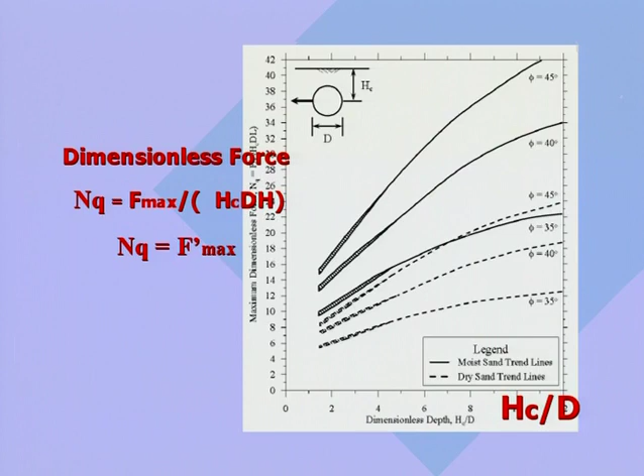And then finally, we developed a series of dimensionless curves associated with dimensionless depth, dimensionless force over here, where we could take the lateral maximum force, divide it by the unit weight and the depth to the center line of the pipe and the diameter of the pipe, and that should be an L, and I've got that as an H. So if you make that an L, we'll be all set. And what you can see here is that there is a significant difference between the dry and what's predicted for the partially saturated soils.

I'm going to talk about, for just a minute, this network for earthquake engineering simulation, where there are a number of institutions, and I understand there's a project here involving the University of Texas facility. Cornell has one, and we have built a facility to do these kinds of tests. This is a picture of it, and what you see here is a low reaction wall.

This is anchored into the floor of our laboratory with 28 rock anchors to get the necessary vertical tie-down forces for the lateral forces that are going to be acting on these split boxes. We have these long stroke actuators that can generate not 1 meter of displacement, but 2 meters of displacement. And we have some external testing frames for looking at biaxial states of stress in pipelines above the ground.

We also built our soil storage bins into the wall of the building. We have structural columns here which are intended to provide lateral force for experiments. So they're quite deep, about 3.5 feet deep. There was a lot of dead space between them, so we created these storage spaces. They can store about 100 metric tons of sand.

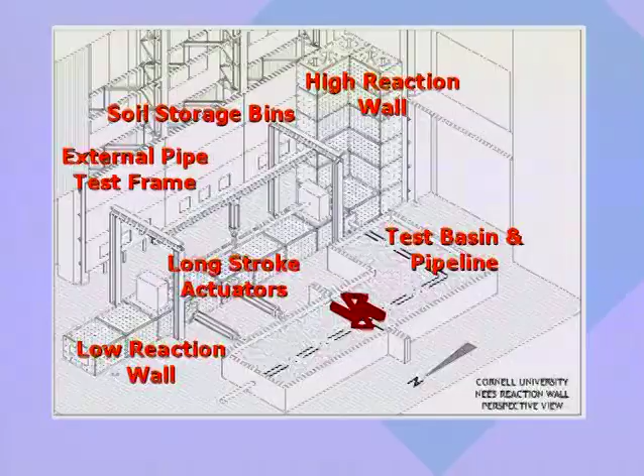They don't take up any floor space, whereas we used to have a 3-story storage bin for the Tokyo Gas tests. These are completely recessed into the wall, with guillotine doors here. We have a system of customized conveyors that can put it in the top, take it out of the bottom and move it all around. So we also have a high reaction wall for above ground facilities.

And then, of course, this displacement, and we're just about to perform what will become the largest full-scale experiments of ground rupture in the lab, where we're going to be moving about 100 metric tons of ground with high-density polyethylene pipelines of 400 millimeters in diameter. These are big pipes. We work in conjunction with the RPI centrifuge. Their 150 G-ton centrifuge allows them to scale down dimensions.

So we can look at the interaction between the buried structures and the extreme loading of the ground in great detail, but we are limited because trying to move more than 100 tons gets to be too time intensive for the personnel involved, and I would wager that becomes economically and time-wise inefficient. However, by working in conjunction with RPI, they can speed up gravity.

They can, at a smaller scale, get the effect of lengthening the pipeline so that where we can look at lines on the order of 20 meters long, they can look at things on the order of 180 meters, and then we can do things at the boundaries to simulate the behavior of the pipe beyond those levels. But our facility is geared up so that we can look at the interactions in permanent ground rupture where most of the action is occurring, where you get most of the curvature and change in the pipe.

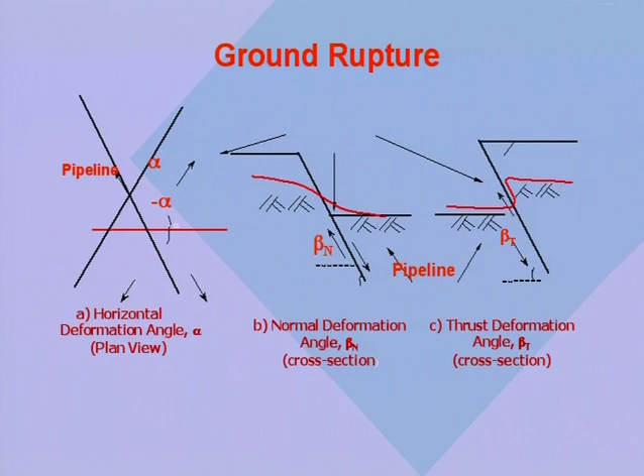We have created a matrix here of 60 different cells with all sorts of variations in these ground rupture patterns, different kinds of pipelines to be studied, and then these cells are populated either with tests at Cornell, collaterally with RPI, or singularly at Cornell and singularly at RPI, and then the rest are numerical. So we have about 20% of the cells anchored down with full-scale physical experiments, and the others would be populated with numerical that are not that far in extrapolation off of the physical, and that allows us then to develop a comprehensive database and library of permanent ground deformation effects on buried structures.

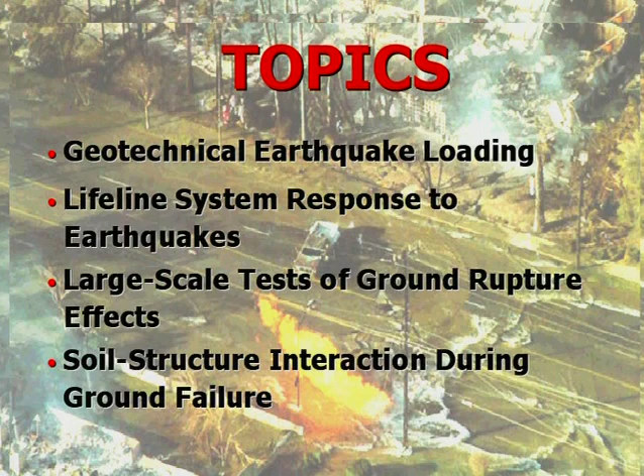So that brings us to my final, or shall I say penultimate slide, where what I've tried to present is that extreme loading events are important, and they are important both at the component level and at the system-wide level. And I think one of the most exciting areas to work in is understanding how components affect system-wide performance. And so I have a few slides here to illustrate to you how we take this component behavior and carry it forward into a system-wide evaluation of performance for the water supply in Los Angeles.

We have created for LADWP, Los Angeles Department of Water and Power, through multi-scale modeling, a very, I believe, accurate representation of all 12,000 kilometers of their pipeline that we can subject to a variety of earthquake hazards. We have empowered that program with a special hydraulic network simulation model that works on highly damaged systems. Your off-the-shelf hydraulic network model cannot do that. It will solve for heads in the system that preserve continuity of flow, which means you'll be getting negative pressures in a system that can't sustain those negative pressures. Ours will not do that. We'll get an accurate representation of the flow under conditions of pressure that can actually exist.

It accounts fully for soil structure interaction, and we've done probabilistic seismic hazard analysis to capture the regional seismic risk, and the whole thing is tied into a GIS system because when we look and make decisions on these complex systems, we need to visualize them. This is a representation of one of the earthquake scenarios and its influence in terms of peak ground velocity on the LADWP system. This is associated with the Verdugo fault system. And this is a representation of the behavior of the system after we've simulated it for this one particular scenario, and that gives us a number of nodes which no longer are serviceable.

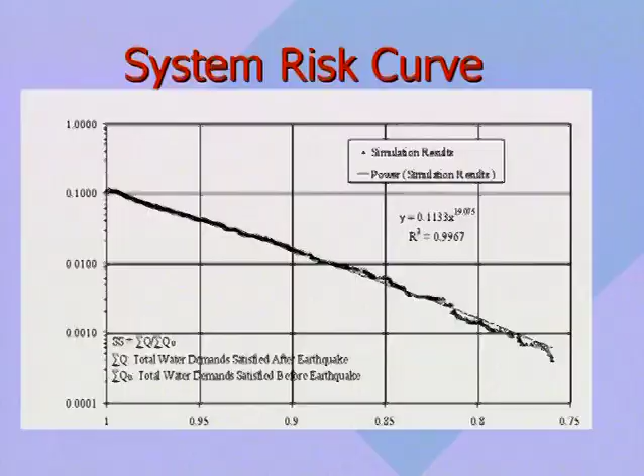We've worked with URS and LADWP to come up with a seismic hazard evaluation predicated on 59 earthquakes. We call them the scenario earthquakes, which are representative of the aggregate seismic hazard, and they've done some analyses to show good compliance for the entire Los Angeles region, which would then be subjected to a lot of different potential earthquakes. And then we develop this annual frequency of exceedance relative to system serviceability, and you can see that for our lowest probabilities and our most severe events in some instances, we can get down to serviceabilities on the order of about 75%, increasing in terms of probability as we go back up.

And what you can see, if we now divide the system up into its major 5 components, so we have the West Valley, East Valley, in the San Fernando Valley, the western, the central, and then the harbor section of the system, and do the same kind of serviceability risk curves, you can see that clearly the harbor system is the one, given the aggregate seismic hazard for Los Angeles, that's the most vulnerable.

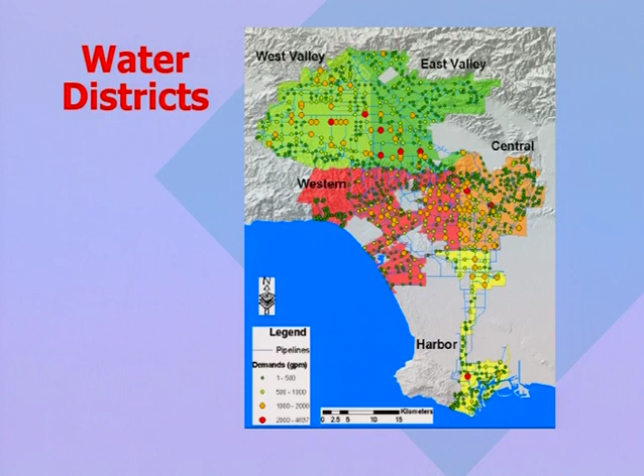I think when you look, you can see with these narrow corridors here, losing a couple of the major lines coming down here can have some very serious consequences. What this allows us to do is look broadly at the system in terms of multiple hazards and threats, come up with a quantification for decision-making purposes, and also have a library of scenario earthquakes so that engineers can study some of the specifics about how the system responds under various circumstances to go in and evaluate the repercussion of these component behaviors.

By the way, what we also can do in this system is put in an improved component, use it 100 times as it would be used, replacing older, not-so-good functional components over a period of time to see what the improvement in system serviceability is, and therefore have a probabilistic means of showing what the increase in reliability is from an increase in component behavior.

So it's really from the component sand grain size, to the component size, to the system, in terms of the evaluation and analysis of infrastructure.

And then finally, I'd like to end this particular talk with a quote from T.S. Eliot. In the Four Quartets, there's a quote from one of the poems called Little Gidding that says: 'We shall not cease from exploration, and the end of all our exploring will be to arrive at the place we started and know the place for the first time.'